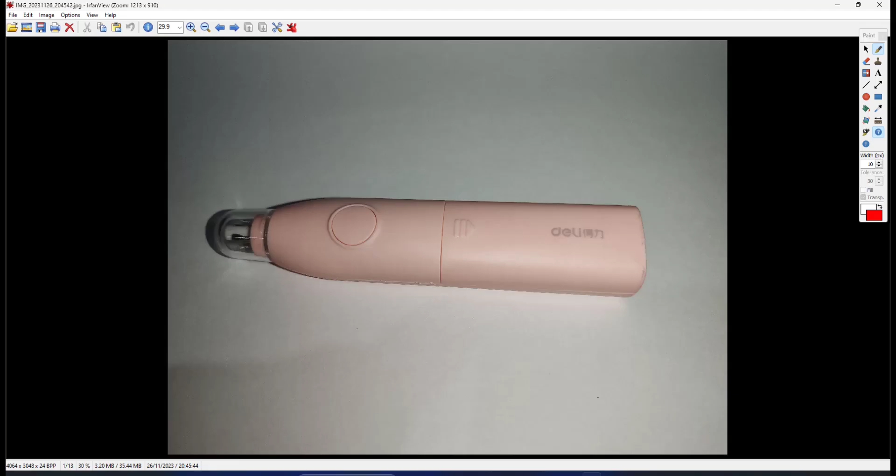In this video, I would like to show you how we will do our part modeling in SolidWorks for our project, which is an electric eraser, as shown in this photo. So this is my electric eraser I already bought.

Before I show you how I do things in SolidWorks, let me explain a little bit about an electric eraser. The purpose of an electric eraser is to do erasing work on your drawing or sketching, erasing a certain portion in a more delicate manner compared with a manual eraser. With a manual eraser, the back and forth movement of your hand can erase portions of your drawing that need not be erased. So the benefit of the electric eraser is it can erase a certain portion in a more delicate manner. That's a good thing about the electric eraser.

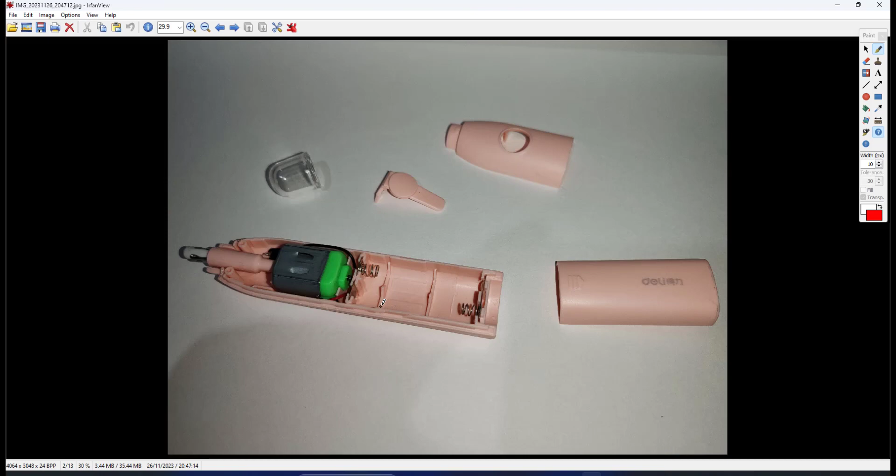Okay, this is my electric eraser. I already dismantled the parts in this image. If we look here, actually this one is the top casing. These two parts here are the top casing, where the top casing is split. You'll see later in SolidWorks. First we model everything, and then we do a split to separate the top casing and the bottom casing. I'll split at the middle, and then the top casing will be split into a front part and a rear part. So hold on.

As you see, the parts here: we have the front top casing and the rear top casing, and this is the bottom casing, and this is a button. The button will be attached to these holes here on the front top casing. Another thing, if you look at this bottom casing, we have a lot of internal structures here.

Let me advise you through my experience doing part modeling in SolidWorks. Try to avoid replicating every detail part when you see it. When you start doing modeling in SolidWorks, the first thing to do is understand the basic function of the component. For example, at this bottom casing, try to avoid imitating or replicating every tiny small thing you see in your physical product. If you try to do every detail from the start, believe me, it will get you crazy.

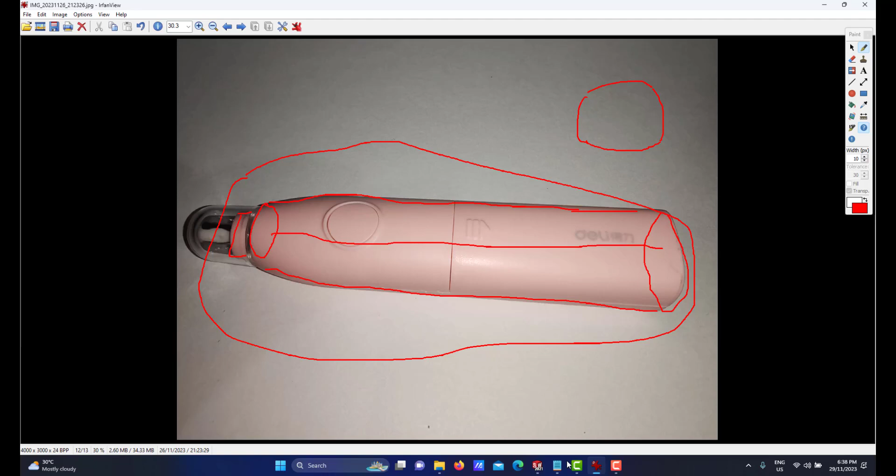Okay, I'm already in SolidWorks. When you do part modeling, the first thing I need to advise you, you cannot straight away start doing the modeling in SolidWorks. You must begin on paper. So I have already measured. You must do this. This measurement I have already done on the sketch. You must sketch it on paper. Everything must begin on paper. I already made a sketch of my main casing.

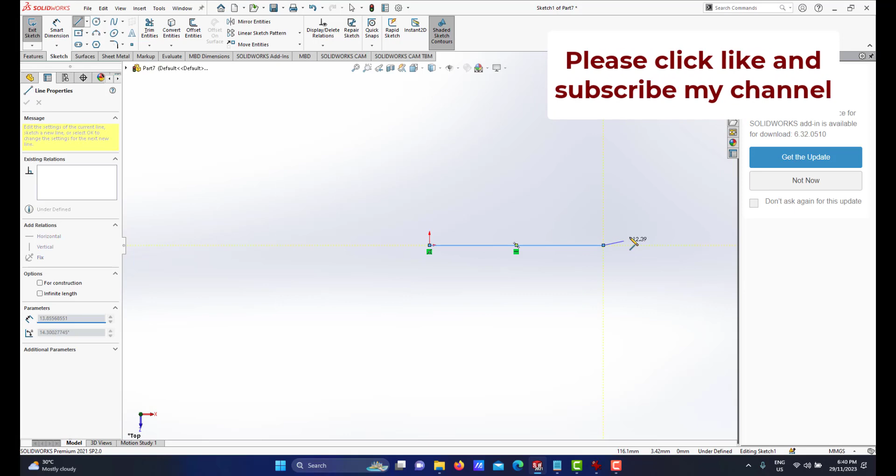So I'll show you how I do this by lofting in SolidWorks. I will do it in top view. I will do a straight line starting from this origin, and the length of my lofting is 109. So that would be the length of my loft. Hold on. 109. Right, let me exit. Let me go to standard isometric view.

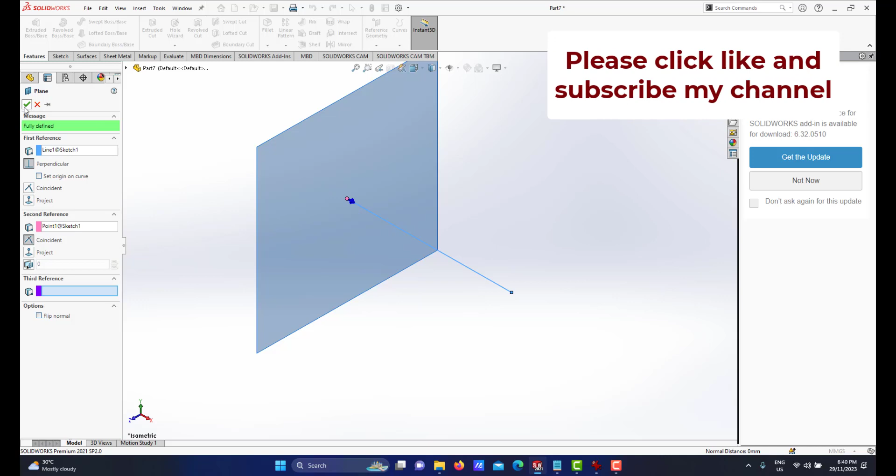So what I will do at the end here, I will do a rectangular cross section. Reference geometry, plane, so I will select this first reference and this one second reference. I will create a sketch. I will create a midpoint line at this point, and I will create another midpoint line here. Make sure it's horizontal, and the dimension. If you see, the dimension is 26 and the height is 22.

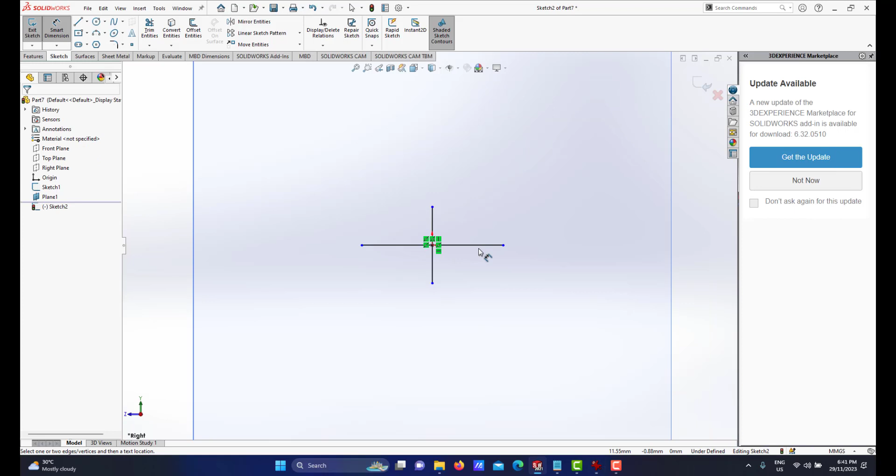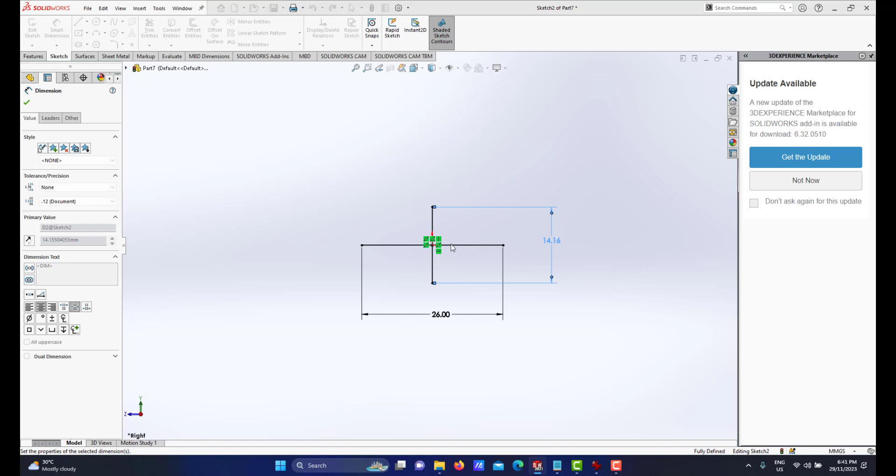So the length is 26, and the height is 22. Right. Okay, this will be my basic setting to do my sketch.

So I will change this one to construction geometry. This is not part of my sketch. The sketch that I need is a spline here. So I will do a 2 point spline here. Snap at this point and that point.

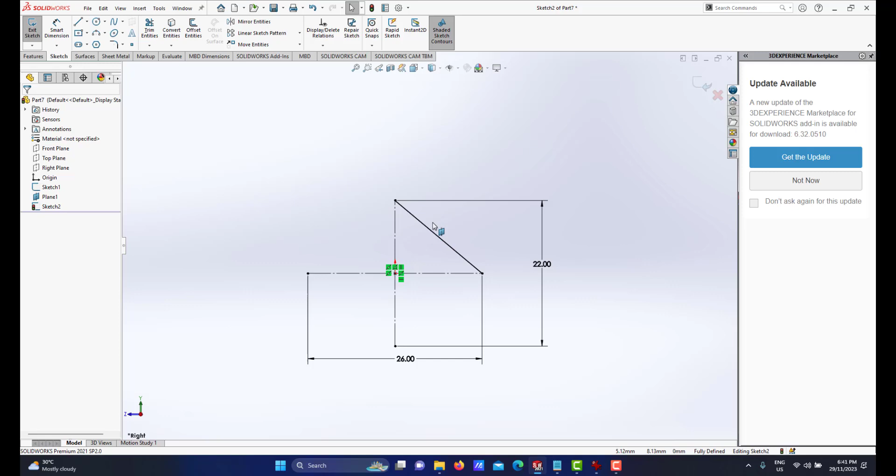Okay, now I want to make a shape like this, kind of curve. There is a 2 point spline. If you look, you have a control point that controls how much curvature you want it to be. So I don't want it to be like this.

This one I need to maintain the tangency because later I will mirror it to the left side, so this handle needs to be tangent to horizontal. I double click at the arrow here, and under settings on the left, I click make horizontal. So if I click again at this arrow, we have the horizontal relationship. Now I can drag the point here to control the width of my curvature.

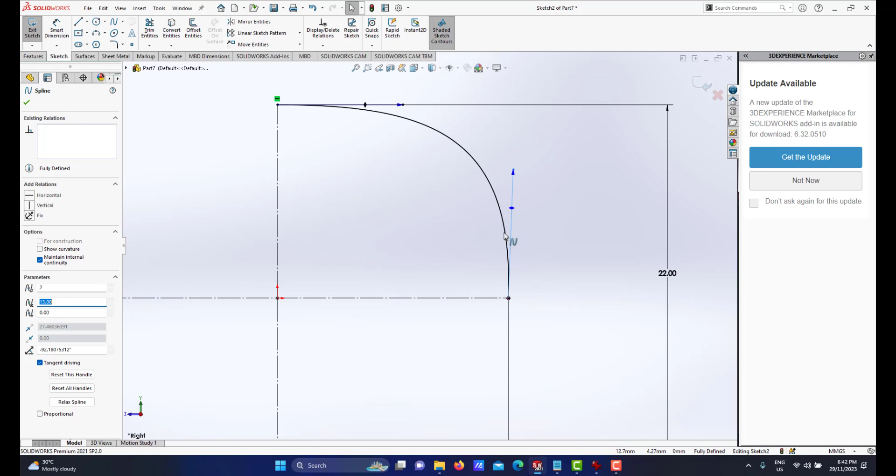Okay, let me just leave it like this. About this handle, I need it to be vertical to maintain the relation, since I will mirror it to the bottom, I need to maintain the tangency to the vertical axis. So I could double click the arrowhead and set it to vertical. Then I can control how much curvature I want.

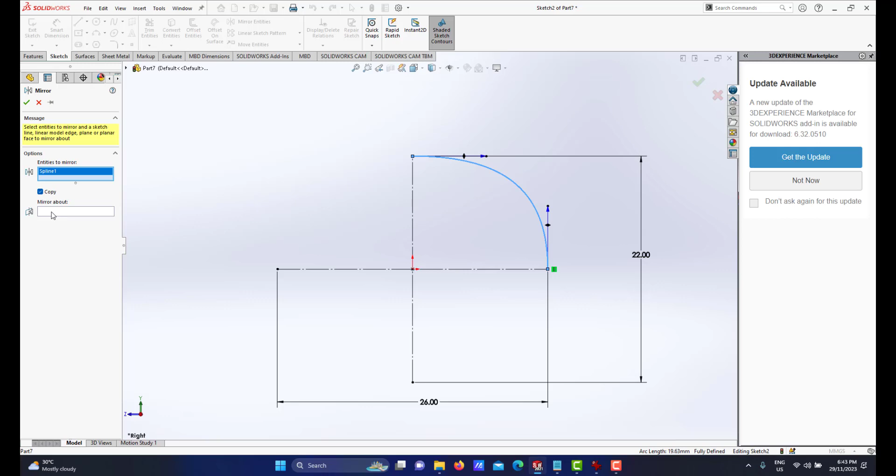It's about like this, so this will be, then I will do mirror. I will select this one, and the mirror about is this line. So I have this mirror, then I will mirror again and select these two things, and mirror about is this center line. Now I have my cross section fully defined, and I exit.

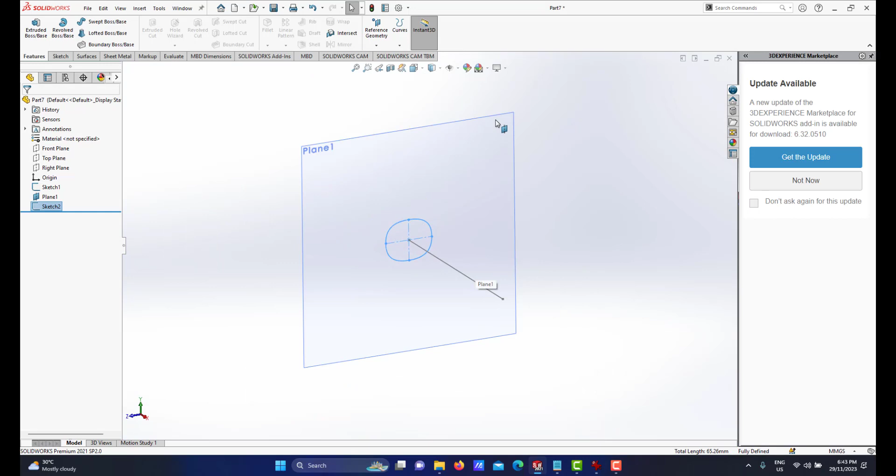Okay, let me hide the plane here. So this is my back cross section, and at the front here it should be round, as I mentioned. At the end here is a full circle. So I will do another reference plane here, this second reference, and this will be my plane 2.

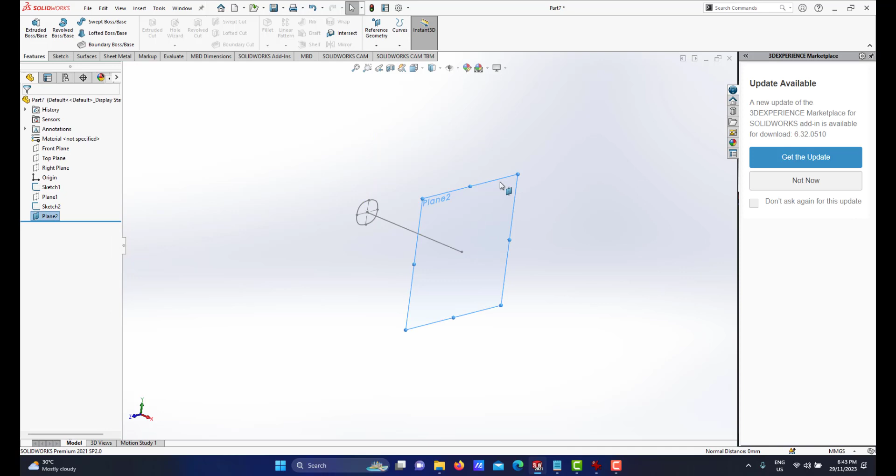I do a sketch, so this will be a circle at this point, by the diameter 18. So I give a dimension of 18.

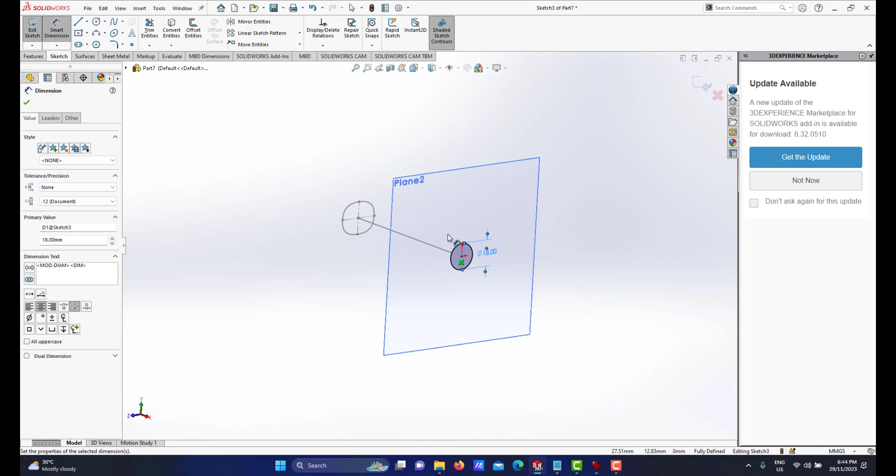Okay, now I have the, hold on. Since what I need to do, loft is not just you have a straight path here and you do two cross sections. I need to do a guided curve. If you look at my sketch here, we have this guided curve.

This is a back guided curve, this is a front guided curve. I need to make this one a top guided curve and bottom guided curve. So I will do two guided curves, and mirror on both sides. So we need a guided curve for us to do lofting.

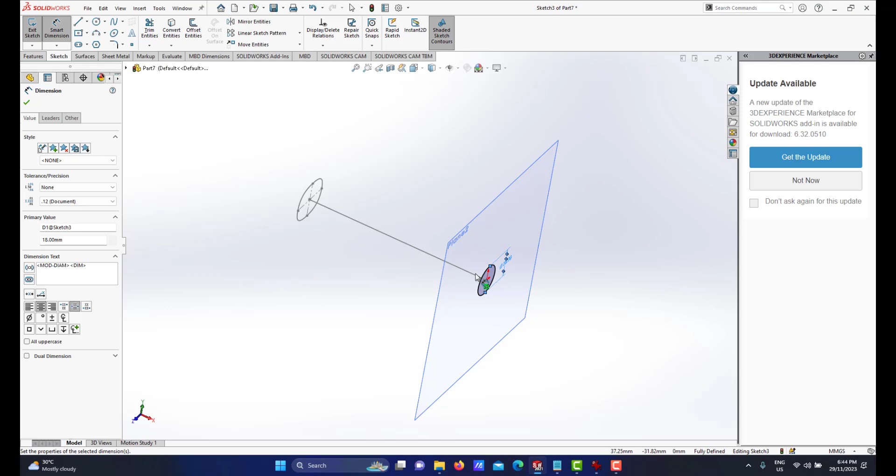To do the top guided curve and bottom guided curve, because a circle doesn't have the top quadrant, I need to add a point at the top quadrant here, and also at the bottom quadrant there. I need to add a point. So let me exit this.

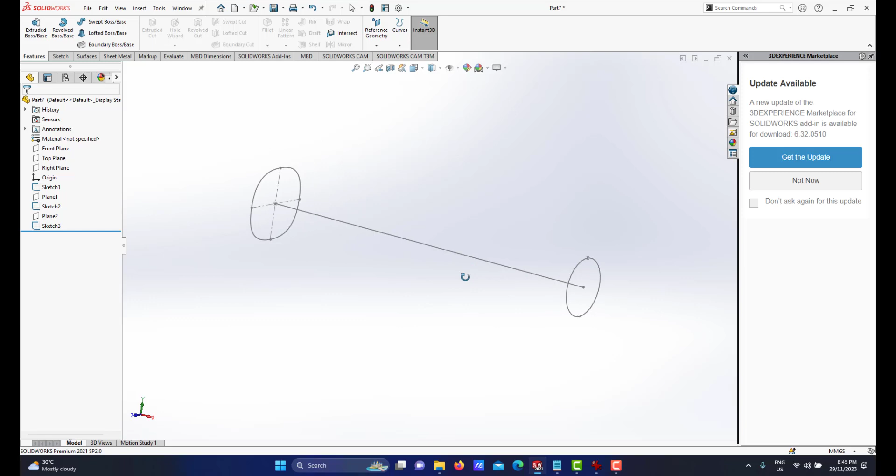Then I hide the plane. Okay, now I will do a guided curve on the top plane first. If I go to the top plane, I make a sketch. So what I will do, okay...

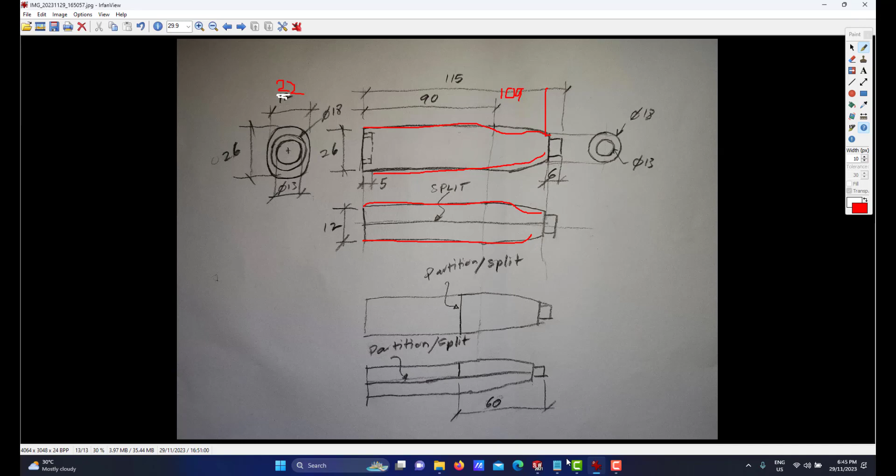I create a straight line here, making sure it's snapped at that quadrant, and make sure its flow is horizontal. As shown in this sketch, the length of the straight segment is 90 up until it stops here. This is a spline, so what I will do is give a dimension here of 90. The length is 90 and it is horizontal.

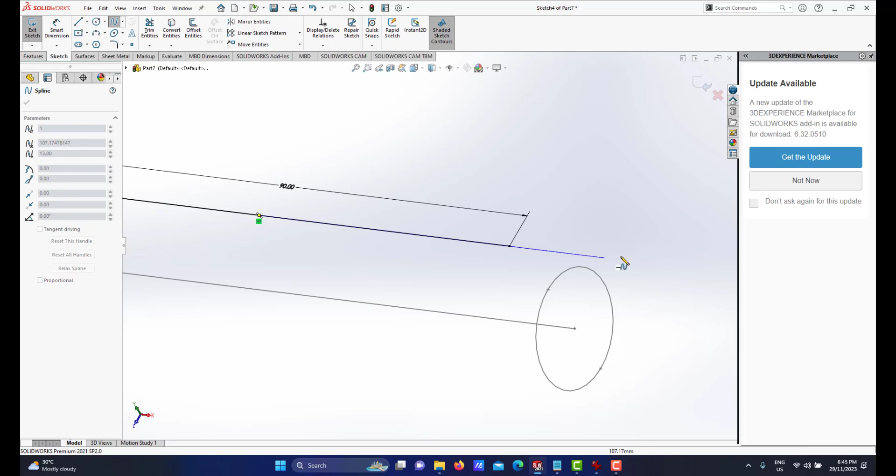And here I will do a 2 point spline, one connected to this endpoint and another one just simply clicking there. So what I will do with this point, I must make pierce to here. Select this, hold down my control key, select make pierce so it will snap at that quadrant. Okay, if you look, this line is not tangent.

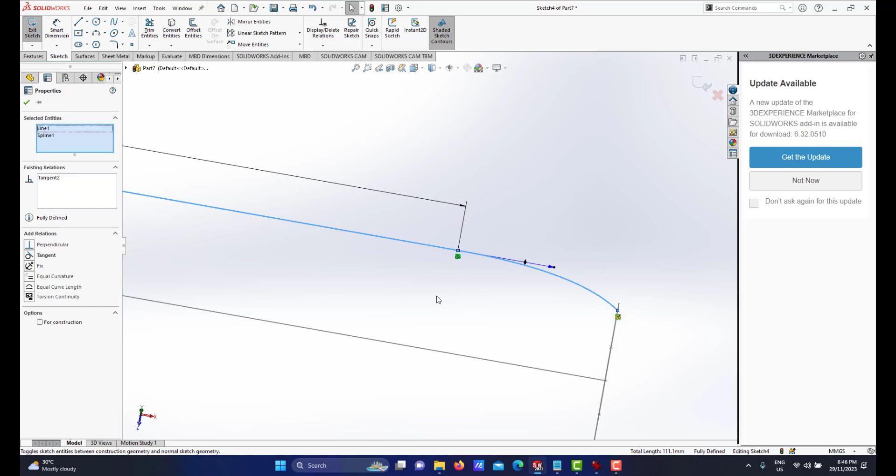We must maintain the relation to be tangent. Since this is a spline, I can control the curve like this, but this is not tangent to this straight line. So what I will do here, hold my control key, select this line, and set the relation to tangent, so it maintains the tangency.

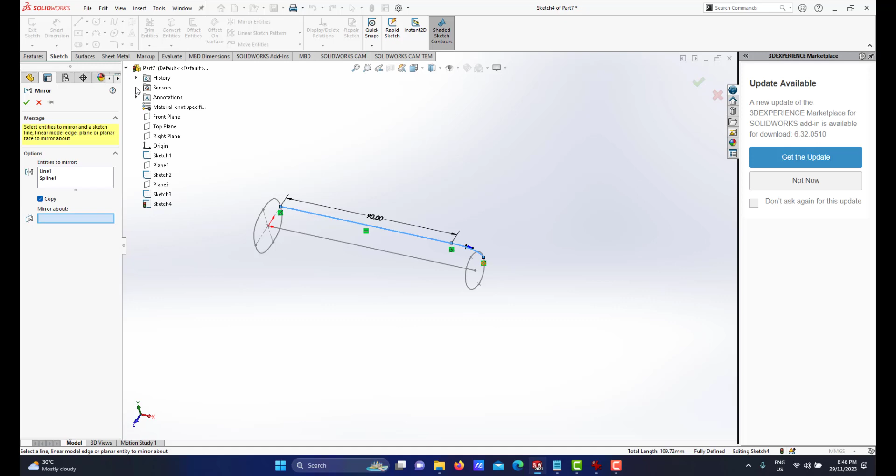Alright, so then I will mirror to the other side. I will do mirror entities, mirroring this line and this spline. To mirror about, since I don't have a center line, I can use my plane. Since my front plane lays at the center there, then I click OK. So I have this guide curve here.

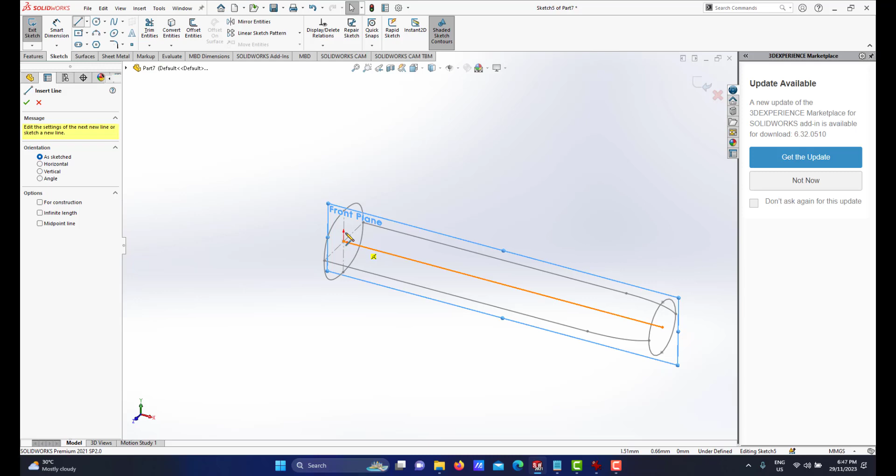Right, now I exit my sketch. Then what I will do is the top guided curve and also the bottom. For the top guided curve, it will be laying on the front plane. So what I will do is a straight line at this point, quadrant, make sure it is horizontal, and give a dimension of 90.

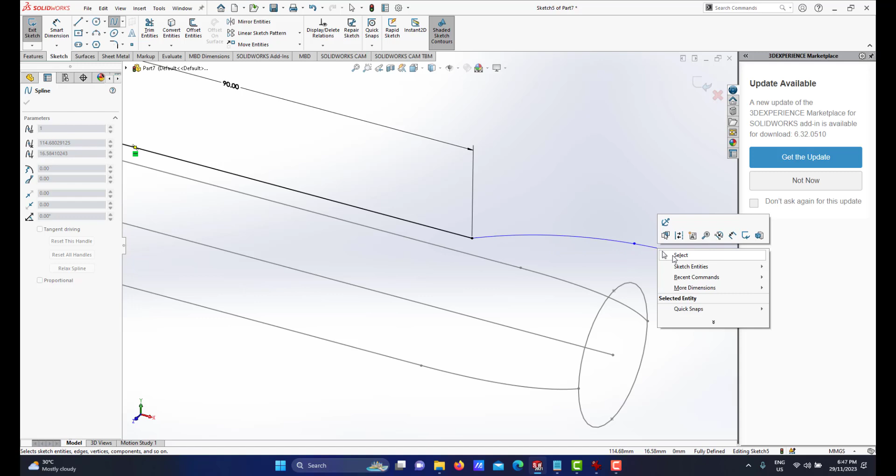Okay, hold on, it's not reading, all right. 90, then I will do a 2 point spline, snap, one is here, one is here. Actually, I can snap it coincident. I just do it like this here and select, hold my control key, make pierce.

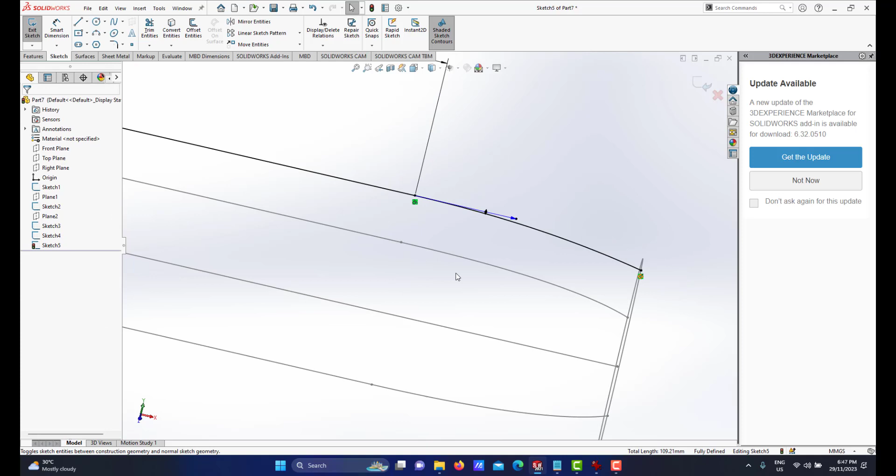We must set that tangency. This is a curve, so I must select this line, hold my control key, select this line, tangency, so it maintains the tangency. I just remain the curve to be okay, that flow.

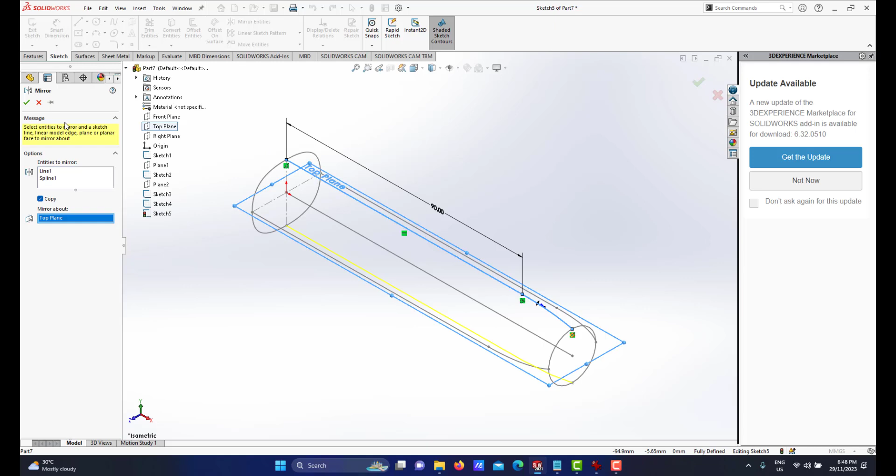Let me go to isometric view. All right, then I need to mirror it. Mirror, entities to mirror is this line and this spline, and mirror about is our top plane. Okay, directly. Okay, so now I have all the structures that I need for me to do loft.

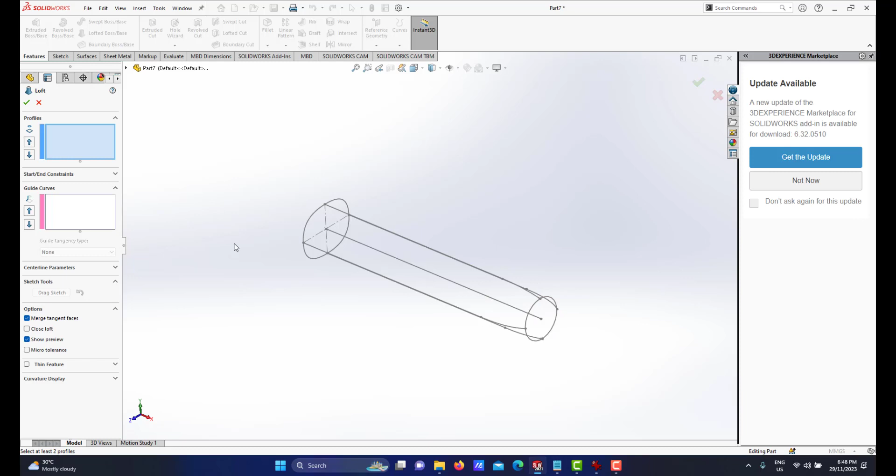To do loft, under features here we have loft. The profile, I select these, make sure the rule of loft is when you select the first profile, make sure it's on the same side. Profile is selected on the left side of this cross section, and the second profile is selected at the left side of that circle.

Now I need to select the guide curve, under here. Guide curve, you must use right click mouse, selection manager. Since our guide curve is all open curve, it's not a closed loop, it's open curve, so make sure you use this one. The second option is open curve. Then select this one and click at the OK button.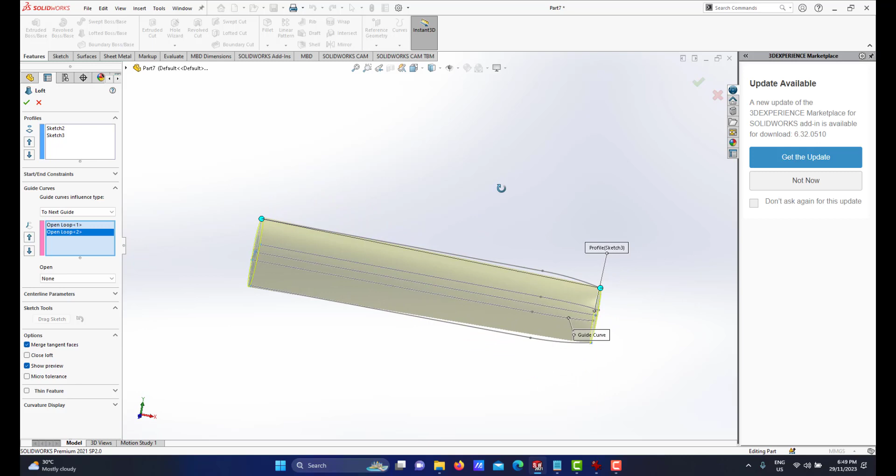The second guide curve, selection manager again, select, make sure it's open curve. Select this one, click OK. Then for the top, selection manager again, open curve, select the top one, click OK. Then selection manager again, open curve, select the bottom curve, select this curve, click OK.

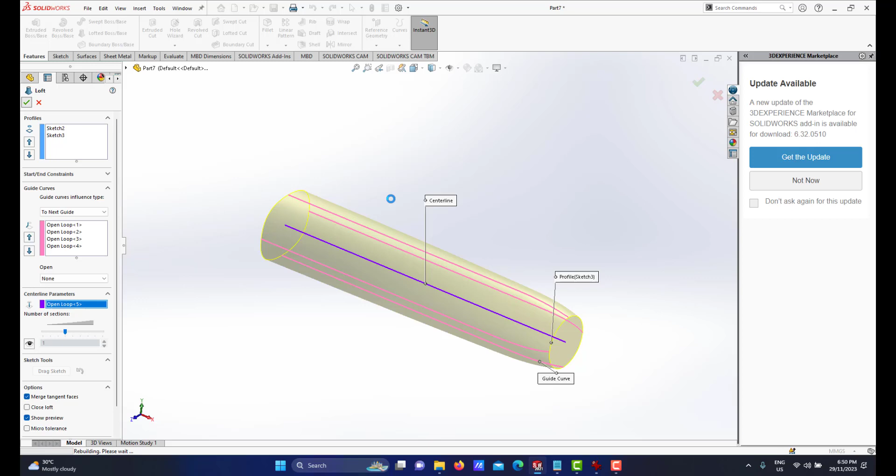And now you follow all the four guide curves. Remember the center line, under here lofting, under center line parameter, use selection manager, selection, use open curve and select that center line. Now if I click OK, I have the shape of my main casing.

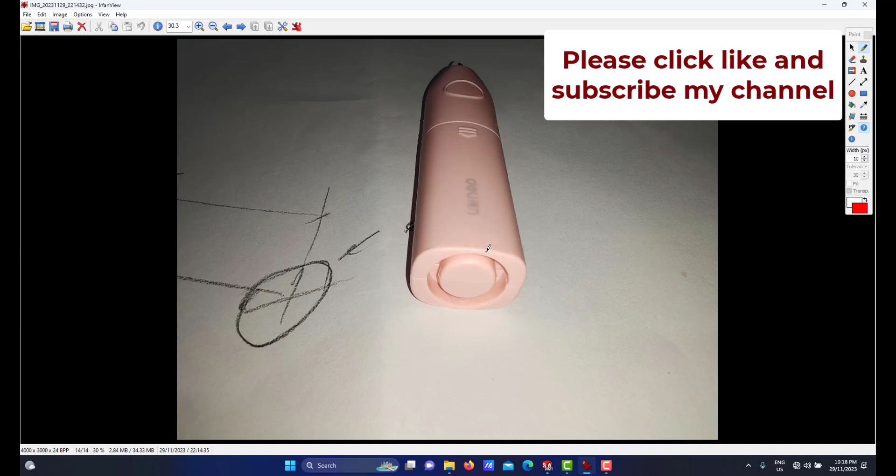The next thing to do, if we look at this image, at the rear here we have kind of a cutout, a circular cutout, as shown in this photo. If you look on this photo, let me show you, at the hand here is kind of a cutout. We already made a dimension on that. If you look at the dimension, the cutout is by diameter 18 and diameter 13.

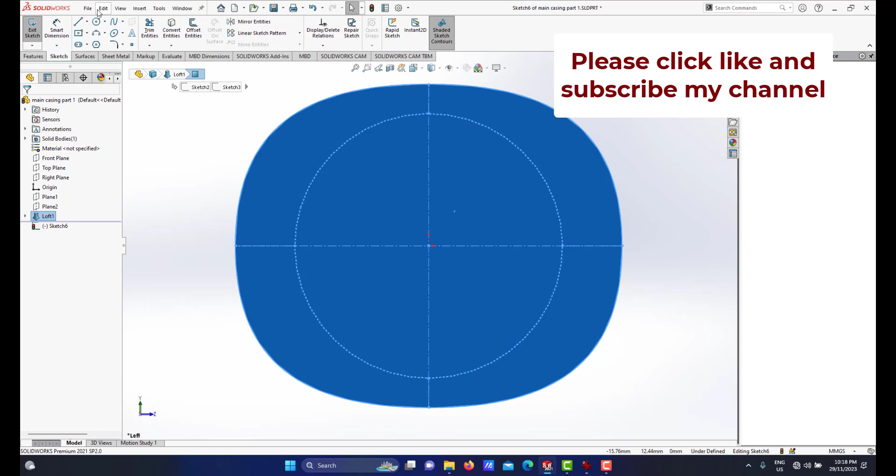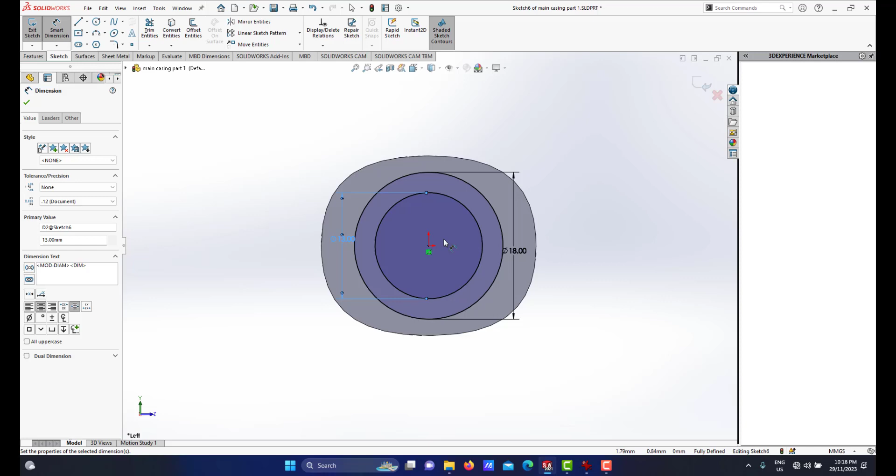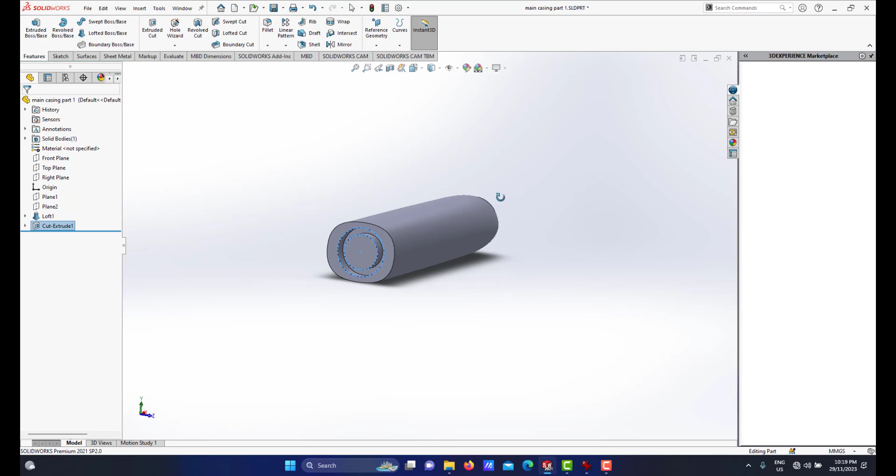So what I will do, at this back here, I will make a sketch. So I have two circles here, one is diameter 18, and the other is diameter 13. So this would be the cutout, like as shown here, the cutout is 5 millimeter. So what I will do, features extruded cut by 5, then I click OK. So I have at the back here, the cutout.

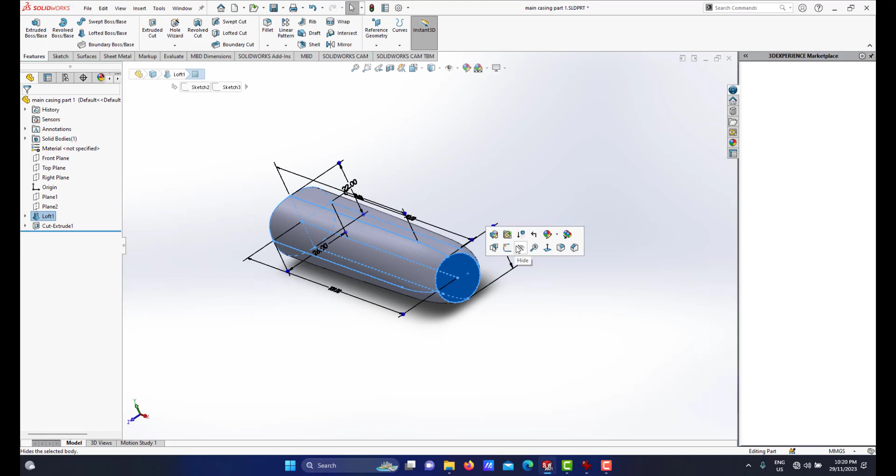Okay, the next, at the front end here, I have a protruding cylinder as shown here. We have a protruding cylinder by 6, the diameter is 13. So I create a sketch at this plane, circle. Sorry, the dimension is 15, and the extrusion is 6.

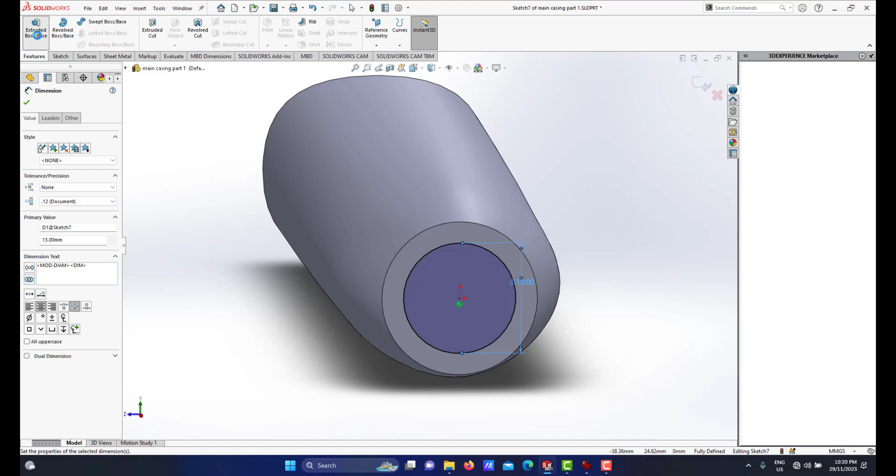Right, let me go for standard view. And now I have a rough shape of this casing.

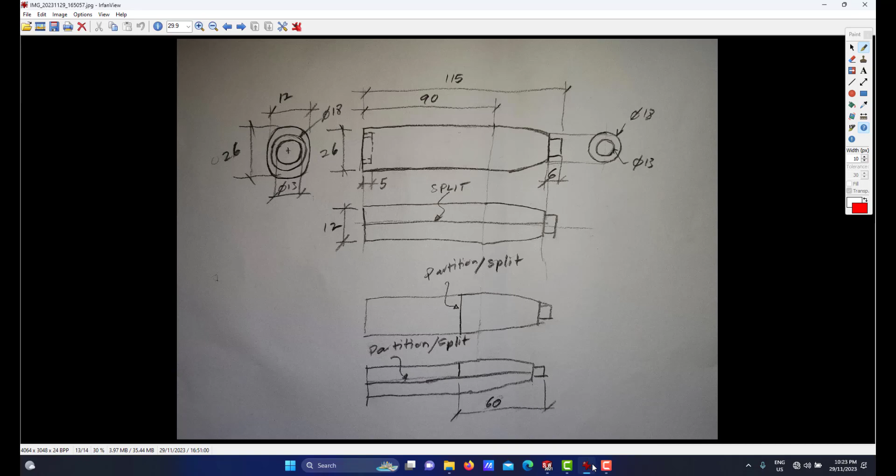Okay, my next move, I will do split. As you can see in this image, we have a split line here. So what I will do, I will split this casing into bottom parts and top parts. So to do split here, I need a cutting plane. I can use my top plane here as my cutting plane since my top plane is really at the center here, so this plane, top plane, will be my cutting plane.

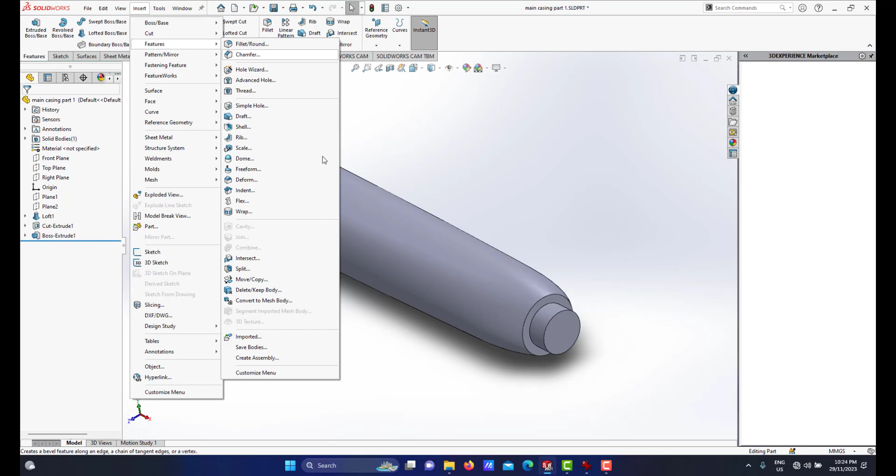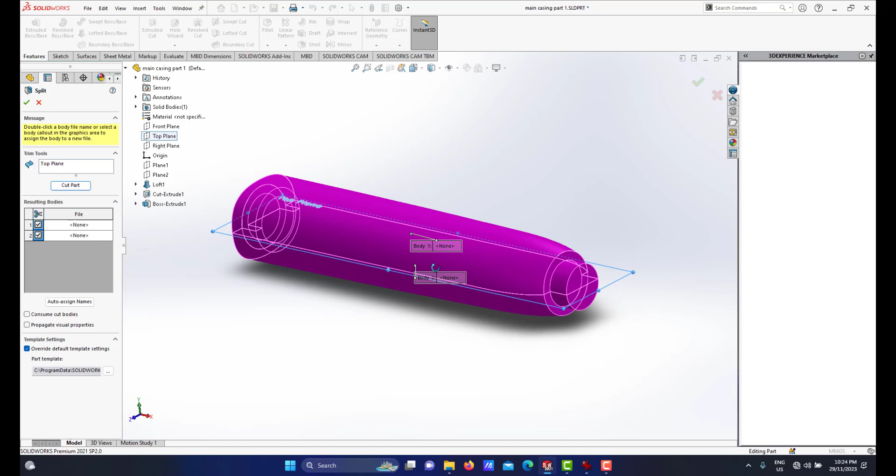So to do split, under insert here, under features, we have split. So the trim tool would be my top plane, so I will do a cut. If I click at cut, we have two part listings here. If I check here under resulting bodies, there is a top part, and I check again this one, this will be our bottom part. So for you to do splitting, make sure I don't want to click at consume cut body. If I check the consume cut body, it means it will delete whatever part that I selected here.

So I uncheck the consume cut bodies and select both parts. This means it will do the splitting without consuming the cut bodies. So I click OK, and now I have two parts, which are the top casing and bottom casing.

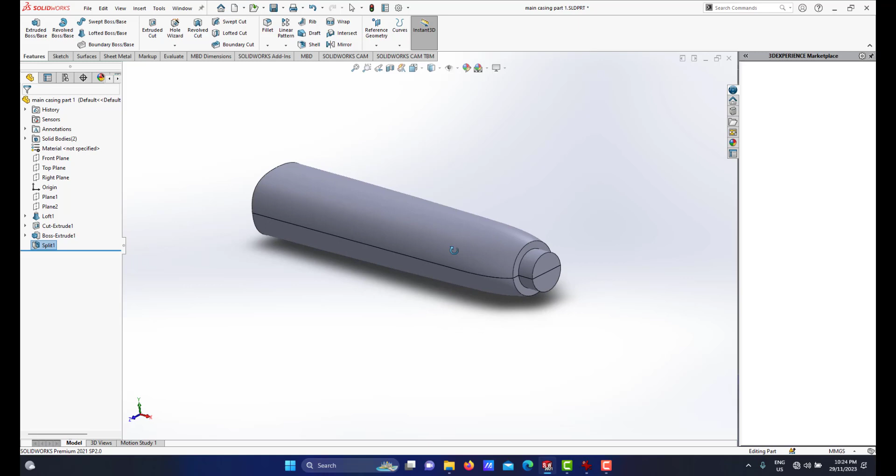I can isolate. If I click here, I isolate it. So this is the bottom casing, and I exit isolate. And if I select the top part, I isolate it. So this one will become our top casing.

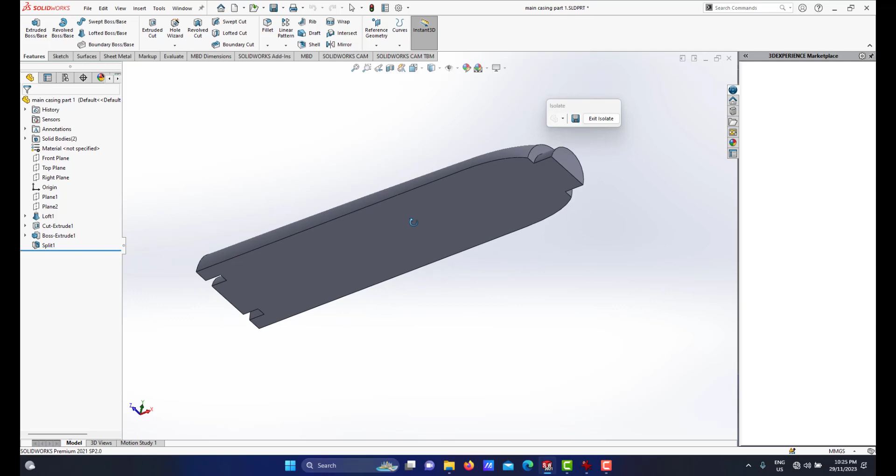Since both our top casing and bottom casing are still solid, I need to give thickness by doing a shell to make the thickness 1 millimeter. But before I do shell, let me exit isolation.

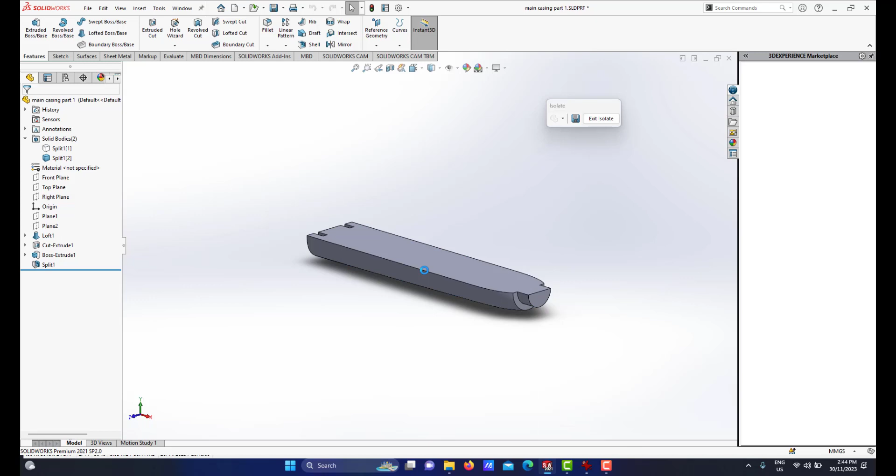All right, our next move is what I will do. I will do splitting. If I isolate, I will isolate the bottom casing here. And for this bottom casing, I will do another split here, under insert features, split. So I will select this face.

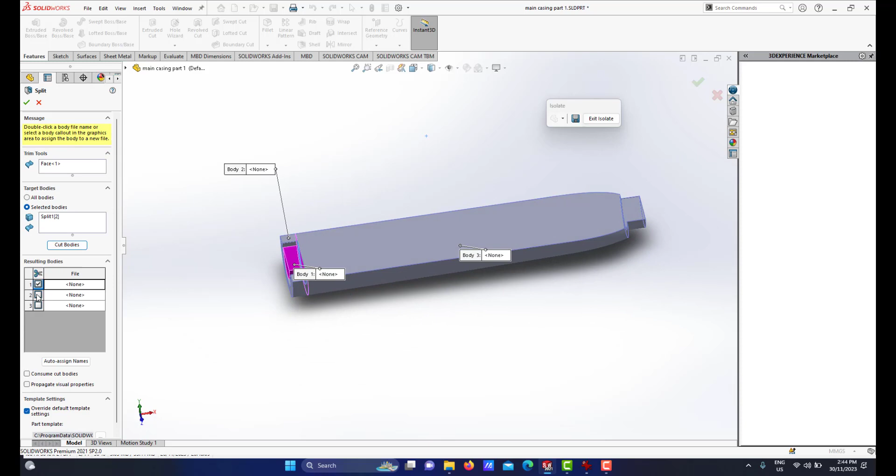Then I will cut the bodies. So I check everything and make sure that consume cut is not checked. Then I have 3 separate bodies here.

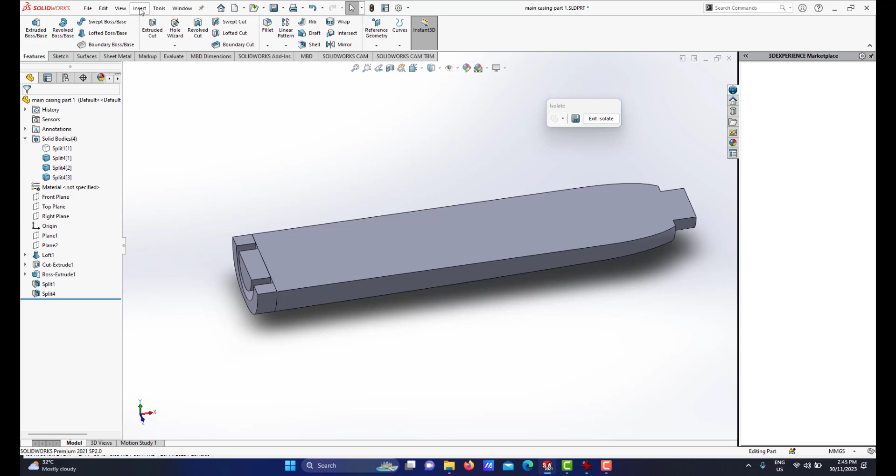This component, this solid body at the back here, I will not join. What I need to join is only the under insert features, then combine. So make sure it's set to add.

I will join these two components, except this one. So I will combine it into one body. Then what I will do, let me exit this isolate.

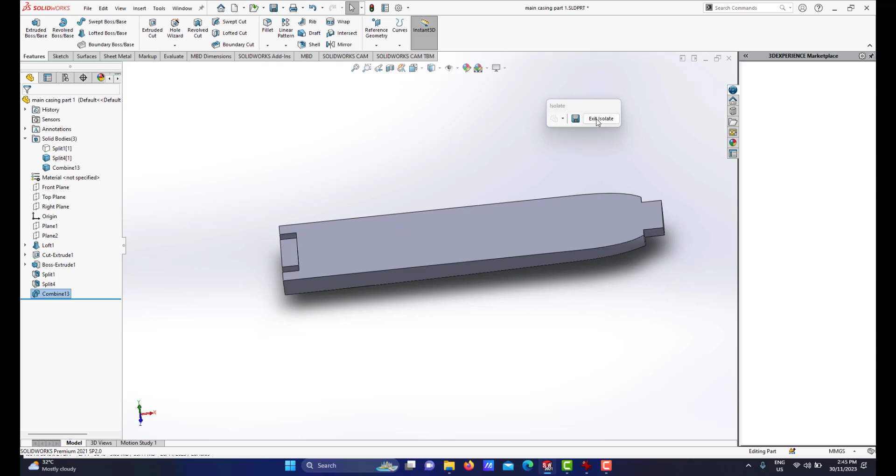Okay, I isolate the bottom casing. For this bottom casing, I will do a shell. Okay, shell. If you look at the picture...

...we have shell thickness in this area. Since at the opening here of the bottom casing, the shell thickness at both sides is 2 millimeters, but at the back here it is 1 millimeter. This area is 1 millimeter.

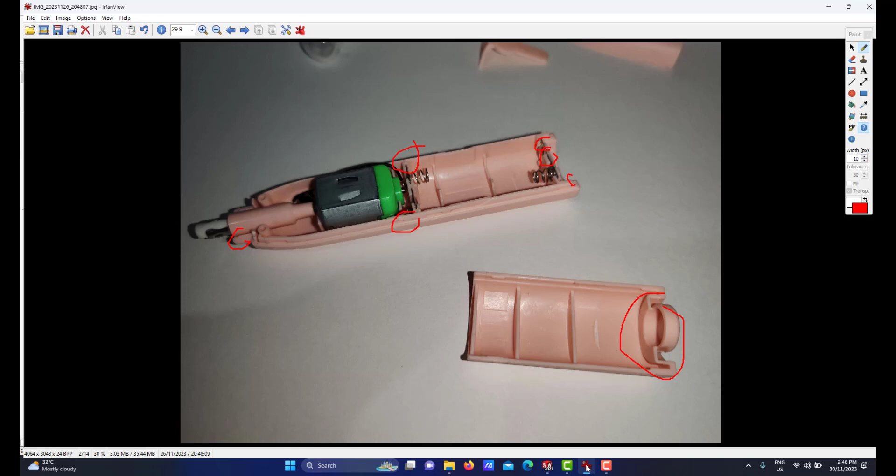It means that for shell, we have two categories. First, I select which one needs to be 2 millimeters. So I select this face and this face to be 2 millimeter thickness. But for this side, this face and this face, I put under here is 1 millimeter.

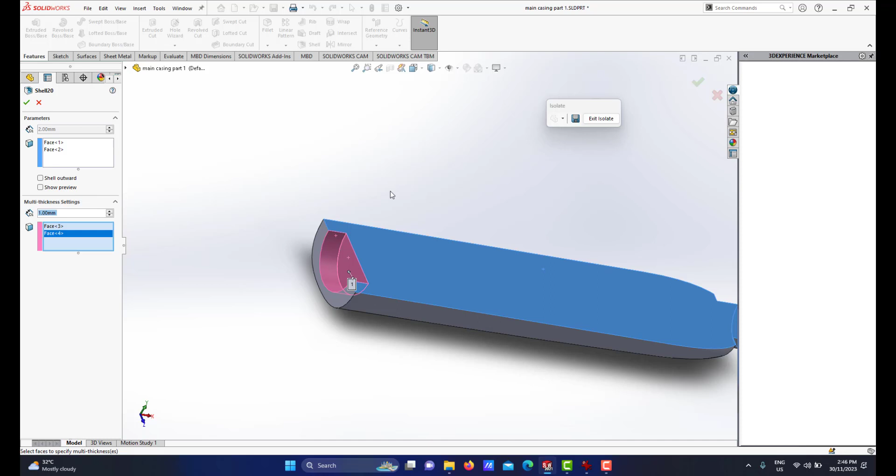The blue color here is 2 millimeters. So I click OK. Solidworks will create a shell with this thickness being 2 millimeters, and the opening here is 2 millimeters, except that the back one is quite thin, so I put it into 1 millimeter.

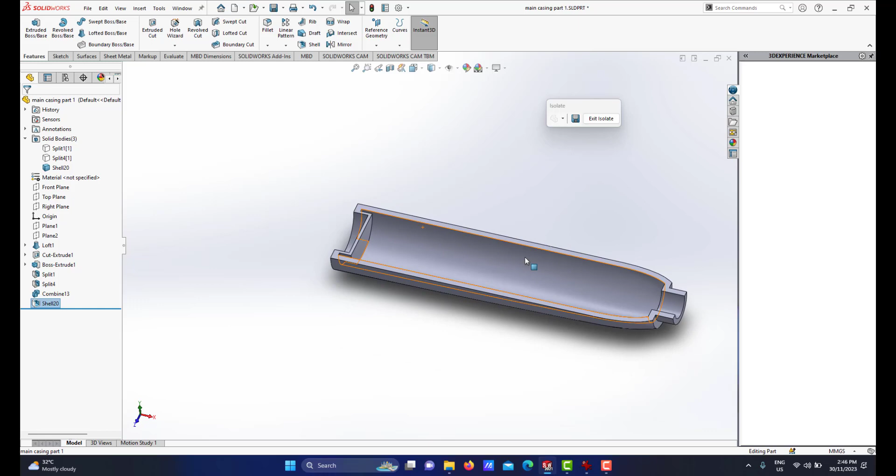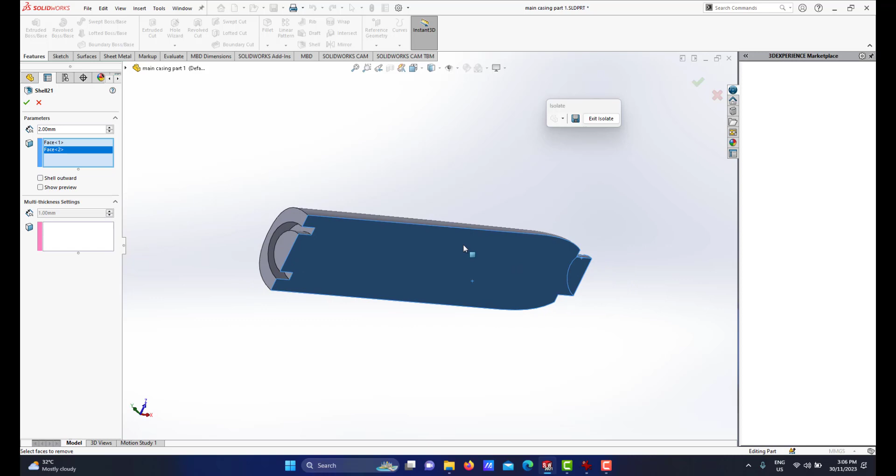Alright, then I exit isolate from the bottom casing, then I go for the top casing. I isolate it and do the same. For this top casing, I do a shell for this face at 2 millimeters. Except for this face, I will do...

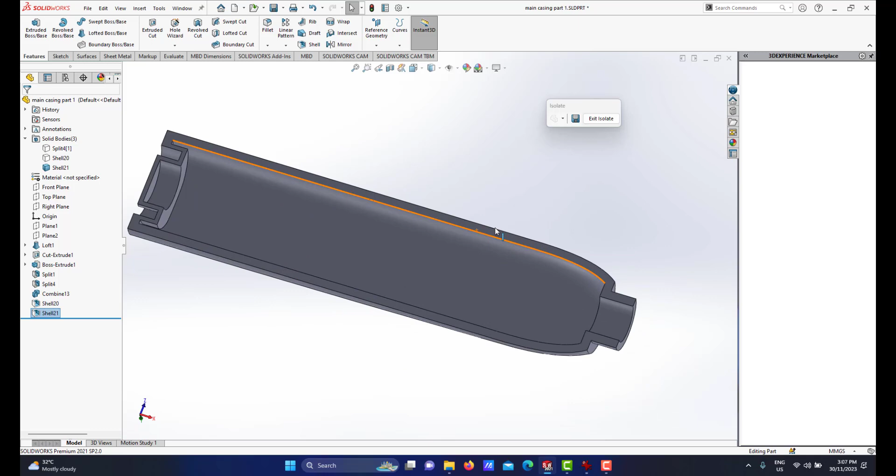1 millimeter, so I select the red color to be 1 millimeter. So I click OK. Like the bottom casing, the top casing has different thicknesses. Here we have 1 millimeter, and for this side we have 2 millimeters.

Okay, let me go for standard isometric view and exit isolate. Alright, then we have another component there. Here, this component, I isolate it.

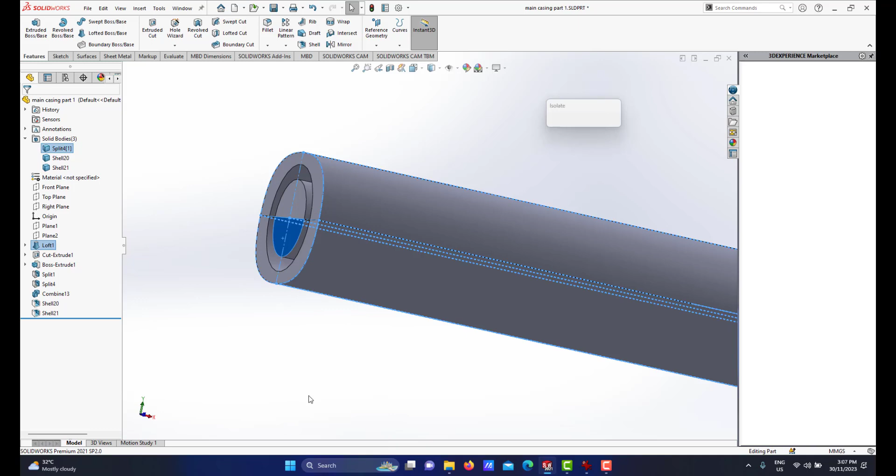For this component, what I will do is a shell of 1 millimeter, for this face and this face. Then I click OK, so it will do a shell of 1 millimeter. So I exit isolate.

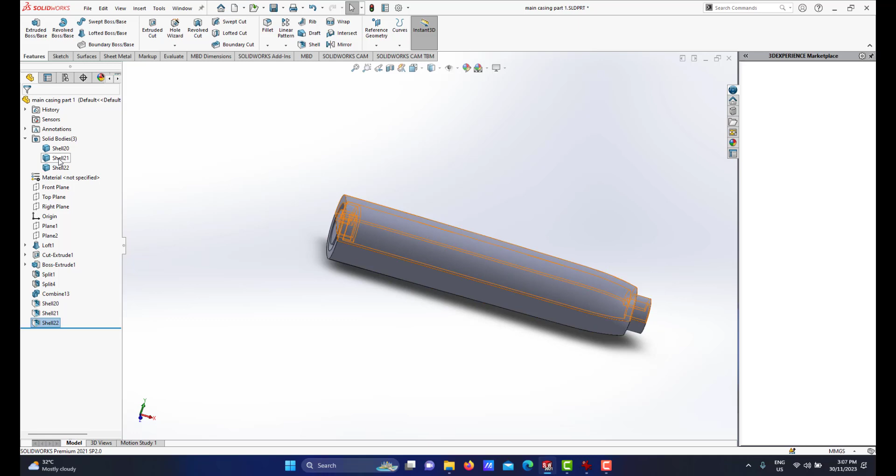Then, if you look here, we have 3 bodies. So I will select this top casing and that third body there. Then I will do isolate. For this part, I will union it, I will combine it as one.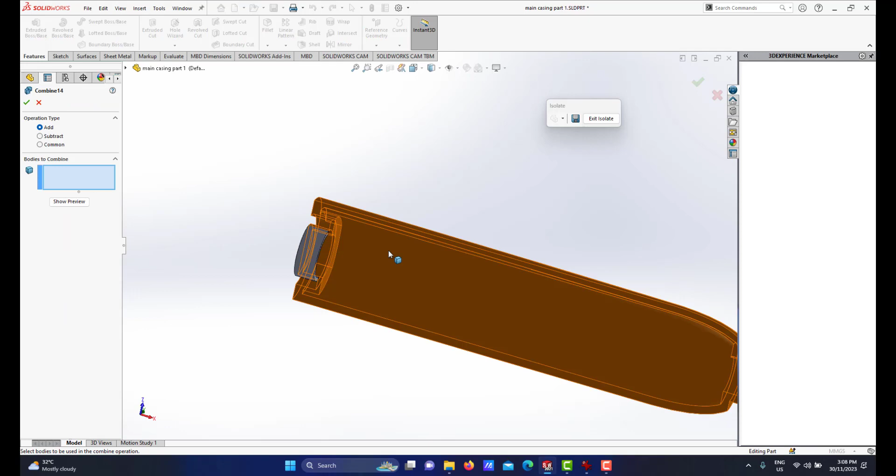So what I will do is insert features, and combine, select these 2 bodies and make sure it's set to add, and combine it as one. So I have this component for my top casing.

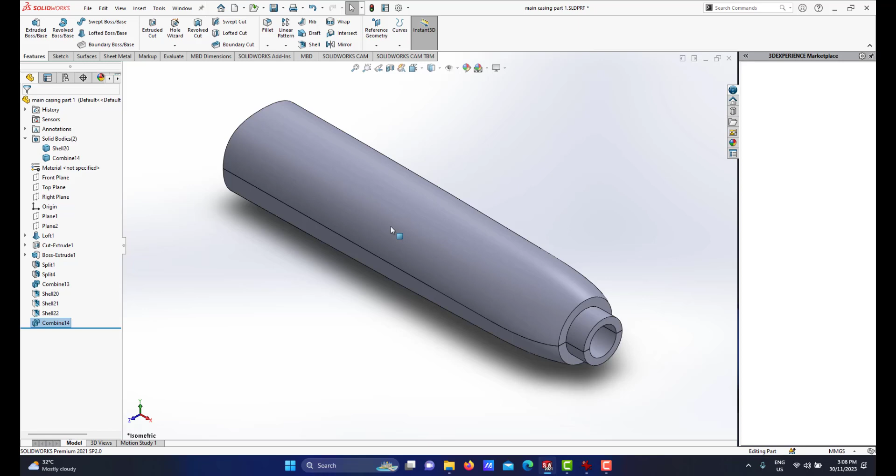It means now, if I exit isolate, let me go for standard view, I have the top casing and my bottom casing.

I can check it by section view just for showing. Let me go for this view. We have kind of like 2 components, which are the top casing and bottom casing. So this will be my first part of my video about how I do the modeling of the main casing.

Later, inshallah, in the next part 2 video, I will show you how we do detailing. We will show how we do the lip and groove for the bottom and top casing.